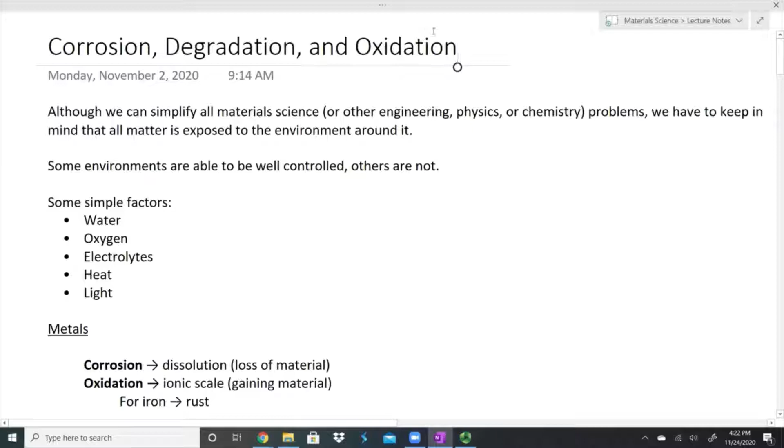So some simple factors we're going to look at are going to be things like water, oxygen, electrolytes, and those are going to be things that transfer electric charge. You watch Gatorade commercials and they say, hey, if you drink this, it's going to replace electrolytes. What it's doing is it's putting ions in your body that's going to allow your body to move things properly between cells. And those are electrolytes. It also works between materials. Heat can also cause things to fall apart, degrade, corrode, oxidize at different rates, along with light.

So we're going to start with metals. We're going to talk about different things that metals can do, and then we'll go through some of our other materials, and then we'll get into some specifics. So first, just really broadly, corrosion. Metals can corrode. Sometimes we use the term corrosion and oxidation interchangeably, but they are different. Corrosion is a dissolution. It's when the material is actually falling apart. We're losing material. That's when something is corroding.

Oxidation, on the other hand, is when I'm actually gaining material. We gain an ionic scale or an ionic film over the top of it. And how do we know that it's ionic? Well, we're talking about metals here. And what we're going to do is we're going to bond oxygen to this metal.

And going way back to the beginning, when we look at what type of material do we have, when I have a metal or something with a mid to low electronegativity and bond it with something that has a higher electronegativity, such as oxygen, we end up getting a ceramic. We end up getting an ionic material. And so that's what's happening here. We gain material. We're gaining some oxygen. It bonds with our metal.

And for iron, and for iron only, we call this rust. It doesn't matter if another metal oxidizes. We don't call it rust. It doesn't even matter if that metal turns an orangish, reddish, flaky color and that it flakes apart. We don't call it rust unless it is iron.

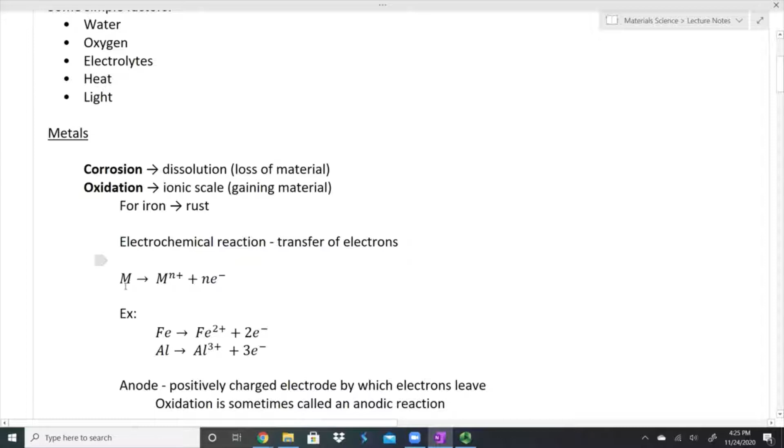So oxidation, and we're still under oxidation here. Oxidation is an electrochemical reaction. It means that electrons are being transferred. And so we just have a little bit of some reaction stuff here. I have some metal, and that metal is going to turn into a positively charged metal and some electrons. We're moving these electrons away from the metal itself.

So I have some examples here. If I have iron, I can get iron 2+, and because of that, those 2 electrons are elsewhere, and so I get my electrons. Aluminum is the same thing. I get aluminum 3+, and those electrons can't just disappear, so I have 3 electrons left over. I also wanted to mention that an anode is a positively charged electrode by which electrons leave. Well, we're transferring electrons off of this. Oxidation is sometimes called an anodic reaction because of this. We are causing electrons to leave.

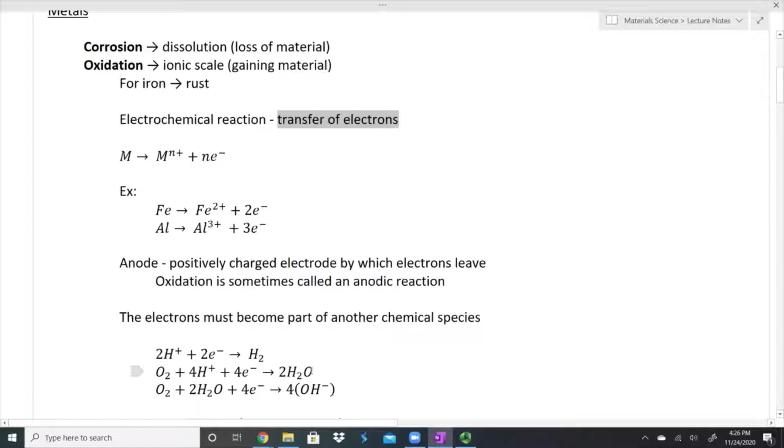These electrons have to do something. They can't just sit there and say, well, we love being free, unbound electrons and just sit here and do nothing. They want to become part of something else. And so here are some options. We can get those electrons to come together with some hydrogen, and we get hydrogen gas. Those electrons could end up bonding together with some oxygen, hydrogen, and we could get water. These electrons are going to do something.

And one other thing that metals do is we get hydrogen embrittlement. Again, this is a type of gaining of material. What happens is hydrogen is a very, very small molecule, and it's very, very easy for it to diffuse into materials. And so when there's enough hydrogen, it's going to diffuse into our metals. It's going to sit at the interstitial sites in our metal lattice. So these are interstitial defects. And what it's going to do, it's going to reduce ductility. And what does that mean? Well, when I reduce ductility, that means I'm increasing its ability to be brittle. So it's hydrogen embrittlement. It's getting brittle because of hydrogen.

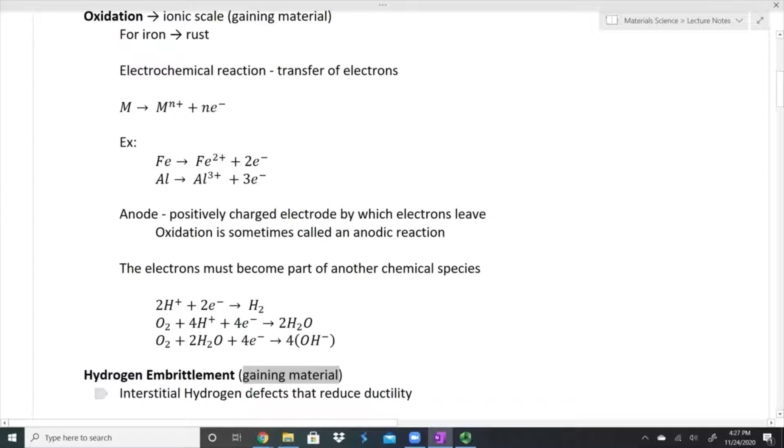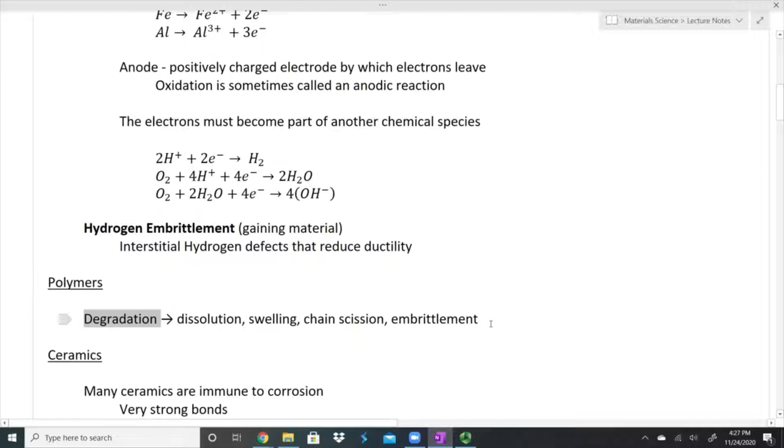So that was really quick. That was metals. I want to talk about polymers really quick. When polymers corrode or do whatever polymers do, the term that we normally use is degradation. So polymers degrade. And what does that really mean? Well, it's this big umbrella that covers a lot of other things, such as dissolution, meaning falling apart. Swelling: it can take in some type of solvent, some type of water or something, and it can swell. Chain scission: polymers are these long chains, and these chains can start breaking down into smaller chains. And if they're smaller chains, then they're going to have different properties. They can become brittle.

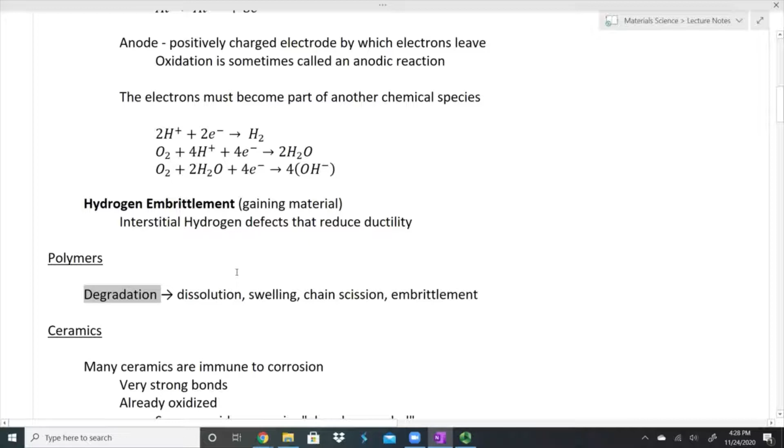So that's polymers. We can talk specifically about some things that polymers do in class. Again, polymers is a huge topic, and so spending any amount of time on polymers is going to take a lot of time, and we're still going to barely be scratching the surface. So we'll talk about polymers in class and answer the questions that you guys have on them.

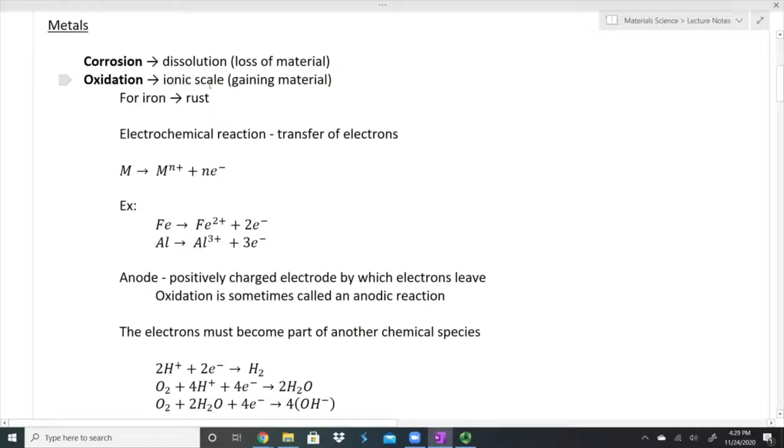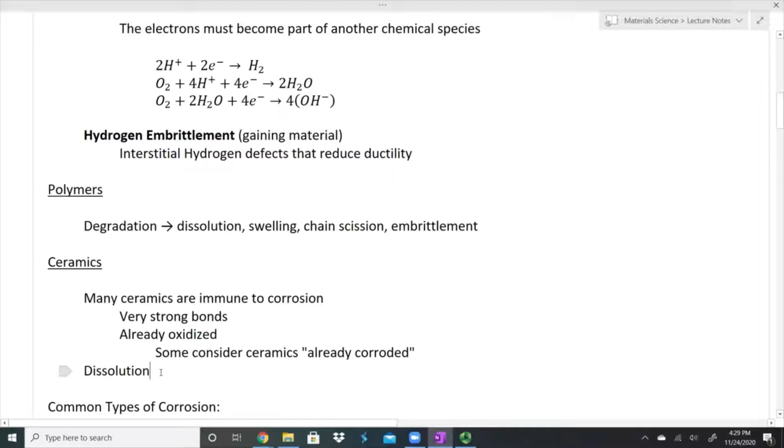Ceramics. Many ceramics are immune to corrosion, or at least a lot of forms of corrosion. The reason for this is ionic bonds are very, very strong, but also they're already oxidized. If we look at it, oxidation in our metals is an ionic scale. Well, that's exactly what a ceramic is, except it's not a scale, it's the whole entire material. We have some metal, something that has mid to low electronegativity, bonded to something that has a high electronegativity. So it already is kind of in the form of oxidation. Some people consider ceramics already corroded. But when they do fall apart, since they can't oxidize, they have dissolution. They fall apart. Again, we can talk about maybe some specific ceramic stuff in class.

When there's some type of electrolyte, something that allows for electric charge to pass through, some type of ions to move, we're going to get galvanic corrosion. Maybe you did this in a chemistry class where you made a battery by putting two pieces of metal into some acid, or you electroplated something by putting one type of metal on one side and another type of metal on the other side in some solution. You passed a current through there, you applied a voltage, and some of one material came off and plated the other side. That's exactly what galvanic corrosion is.

So some examples of this would be when we coat iron with zinc. Maybe you've heard of galvanized sheet metal, or you've gone to Home Depot or Lowe's to buy some nails or screws, and it says that these are galvanized. What it is, they've galvanized it. They've made it to where one material is going to corrode in preference to the other. And if you coat this entire piece of metal with something that's going to corrode, then the electrolytes can't get into the other material.

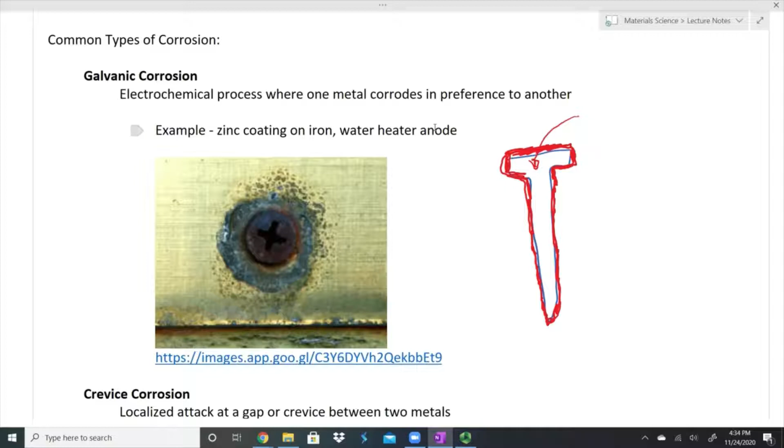And if you've ever opened up a water heater or had to get it removed, this thing has been completely eaten away. It's got holes in it. It's corroding. That means it did its job. What's happening is that zinc anode, again, something that corrodes somewhat easily. When there are those electrolytes in the water that want to corrode something, they're going to corrode the thing that can corrode the fastest. They're going to corrode that sacrificial zinc rod rather than the actual water heater itself, which will prolong the life of your water heater.

We have crevice corrosion. It's a localized attack at a gap or a crevice between two metals. I have this picture here. Two metals were riveted together. It looks like they were painted somewhat as well, which can help with corrosion, but maybe they missed a spot when they were painting it or something happened. But somehow our fluid, our electrolytes, got into this seam, into this gap. And what happens is they get in there and they just sit in there, and it gives them plenty of time to begin the corrosion process.

It's not just the fact that it runs across it as a bead of water is dripping down the surface. They get inside this crack, this gap, this crevice, and they just sit there, and it will work on it and work on it. So there's an example here, but some other examples are if I have some bolts, maybe some washers between the bolts and the surface.

There are little gaps where things can get stuck in there, and it just works on it and works on it until it begins corroding.

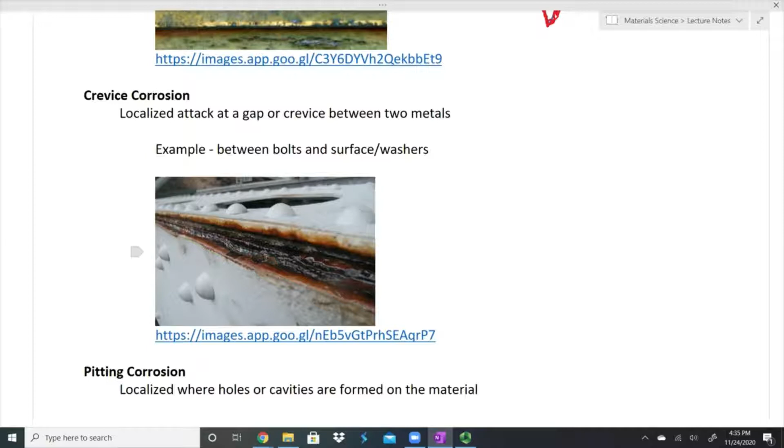We have pitting. Pitting is localized, where localized holes or cavities are formed in the material. Sometimes you can see these pock marks on materials. Pitting is a difficult one to know how bad it is. And the reason for this is I have this surface and I have something that's corrosive on it, some type of chemical or something that wants to start eating away at this spot here.

What's going to end up happening is it's going to go ahead and start corroding it. Okay, we see this pockmark. The problem is we don't know what's going to happen next. And so there are a few things that could happen, and this is why pitting is very, very scary. One thing that can happen is this pockmark can widen out. It just gets nice and wide. That's one thing. It's not great, but it's actually the best of all the things that could happen.

Because something else that could happen is it just gets deeper and deeper and deeper. I get this really deep pit. That's not good. More material loss, especially if there's going to be maybe some bending or some twisting or something that happens. I've lost stability here because I'm no longer having this material bound together. That's not good, but there's even worse things that can happen.

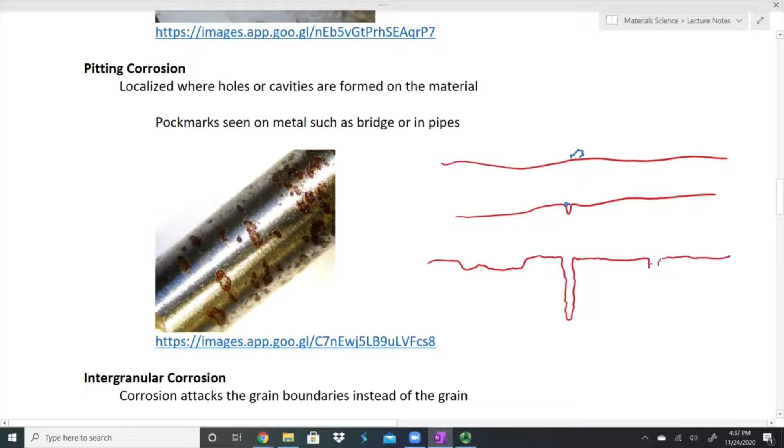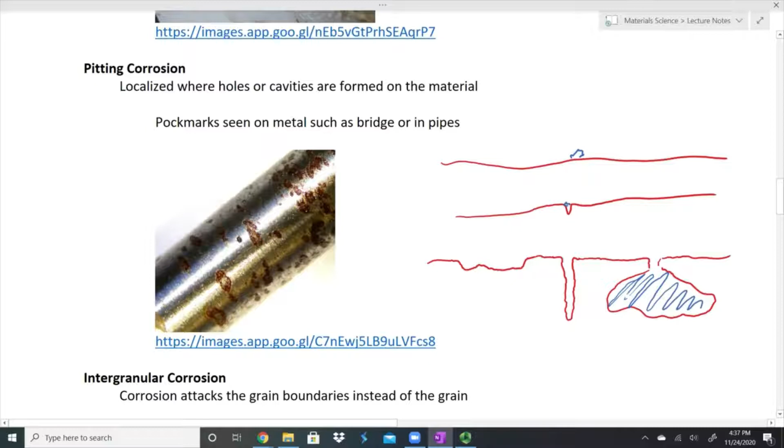Sometimes I have this little hole, but what it's going to do is create a big gap underneath. And it's very difficult to figure out how big this gap is if I can only see the opening. How do I know whether it's big or little? And once this happens, things can accelerate relatively quickly. I have a lot of surface area around here, which means that electrolytes and water can get trapped inside this pit, and it can just keep working on it, and it will corrode it faster and faster and faster.

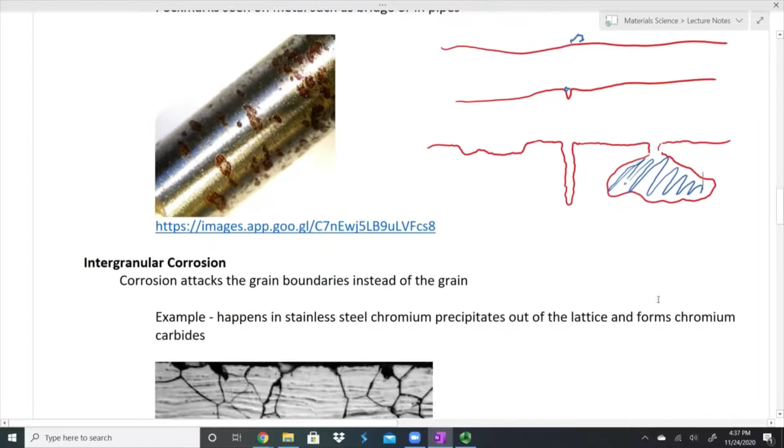We have intergranular corrosion. These are corrosion attacks at the grain boundaries instead of the grain. So normally, if we go way back to when we were talking about defects in materials, one of those defects, our two-dimensional defect, was our surfaces. Surfaces are considered defects because it's a break in our crystal lattice. And so if I have a material, this lattice goes forever deep, forever to the left, forever to the right, forever in front, forever in back, but there is nothing on the top of this.

So that means all of these atoms are bonded together in all directions. The ones in the center have atoms surrounding them all over the place, but the ones on the surface don't. They're open to the top. They're high energy because they're missing something. They're not completely surrounded. And so when something like oxygen comes up, it's going to be somewhat reactive, and it's going to be able to bond onto these spots that are waiting for something else. It's higher energy. So that's how corrosion normally works.

Intergranular corrosion, it's the same idea, but instead of just dealing with the surfaces, we're going to be looking at the grain boundaries. The grain boundaries are also a two-dimensional defect. It is an interface between two grains, and sometimes our corrosion is going to attack at that high-energy grain boundary. This happens in stainless steel. Stainless steel has its iron with carbon, chromium, and some other stuff normally in there.

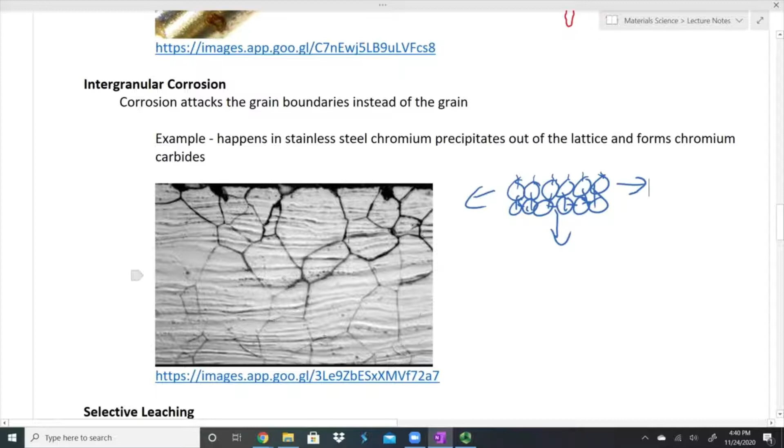We no longer know necessarily what percentage of stuff we have in here, but what's worse is it precipitates to the grain boundaries. And so in these grain boundaries, we actually get these chromium carbides that just sit there, and those don't bond as well as these grains bond to each other. It weakens these grain boundaries and can cause failure.

We can get selective leaching. We get a component within an alloy that leaches out. So here is an example, zinc leaching out of brass. Brass is a mixture of zinc and copper. And under certain circumstances, the zinc will want to leave. The copper's fine staying, but the zinc wants to get out of there somehow.

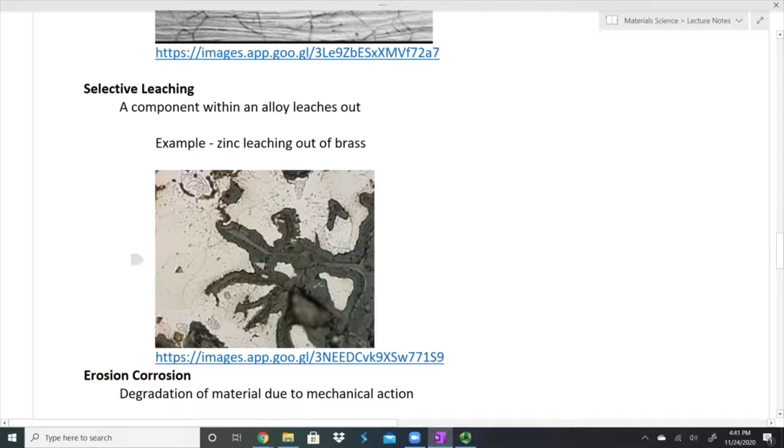And so what it does is it diffuses out and it gets pulled out of my material. Again, what happens is I don't have the same material I used to have because I am losing zinc. So my percentage of copper is going up and my percentage of zinc is going down. I don't have the same material anymore, and I get this corrosive stuff coming out of my material.

This little drip, this little inconsistency in where my pipes join together, is going to cause some turbulence. This turbulence is going to speed up this water and it's going to erode away part of my pipe at a faster rate because of that speed, especially if there's something inside of this water. Maybe there's some abrasive material, little pieces of metal, ceramic ionic particles, or some sand. The more abrasive it is, the worse it's going to be, but it's corrosion due to some mechanical action.

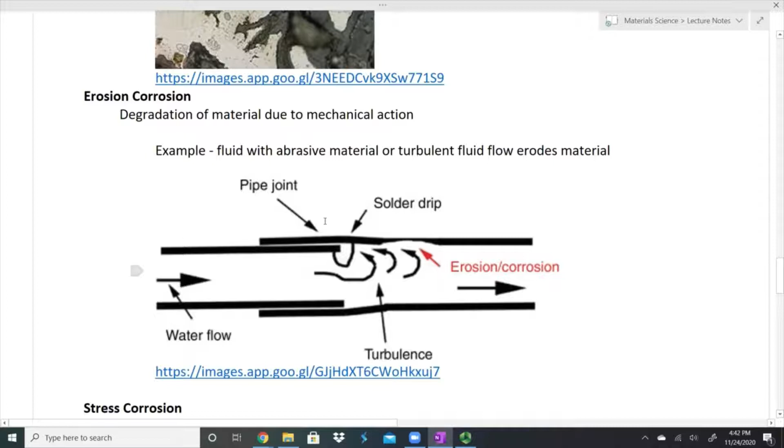There's stress corrosion. This is corrosion that occurs at a crack in a corrosive environment. So we talked about fatigue, and we talked about creep, and how we get these cracks, and these cracks will slowly propagate. Well, what happens if we get this crack, but we're also in a corrosive environment, and inside this crack we're actually getting corrosion as well? It's going to accelerate our fatigue and our other problems.

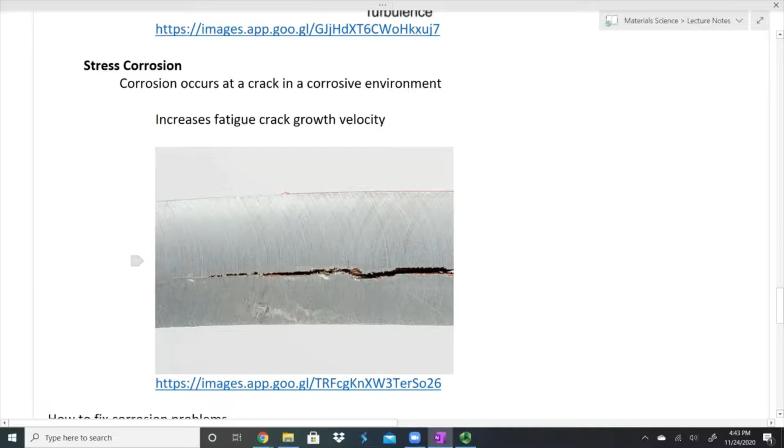So that's not good. Once we have these little cracks, yes, the cracks can grow on their own through loading and unloading or through constant loading, but we have to keep in mind that things are more complicated than just loading and unloading. We're in this environment that's corrosive, and it can also add to this crack getting worse and worse through corrosion.

So we talked about a whole bunch of different ways that things can corrode. So the question is, how do we fix this? There are a few ways. This is by no means all the ways, just a few quick ones. One is we can insulate. We can put some type of physical barrier in there, a barrier from the environment. We can coat something. We can paint something. We can put a ceramic coating around something. We can insulate it from other materials.

If I have two different types of materials in an engine that are in contact, and there's fluids flowing through it, and air, and high temperatures, it's an area that could corrode really quickly. What do we do? Well, we could put a gasket between them, even if it's just a thin piece of paper, so those two metals are not in direct contact with each other.

What that's going to do is help insulate so that we don't have direct contact. It means that maybe we won't get that galvanic corrosion as easily. We could reduce cracking and we can reduce stresses. That can help fix some corrosion problems.

Some ways to do this is we use better materials. We don't use cheap materials that maybe are weaker in the first place, so those cracks won't start as soon. Another way is we could get a better design. We could add something into our design to strengthen our material so that it's not bending as much and those cracks don't happen as easily. We can add inhibitors.

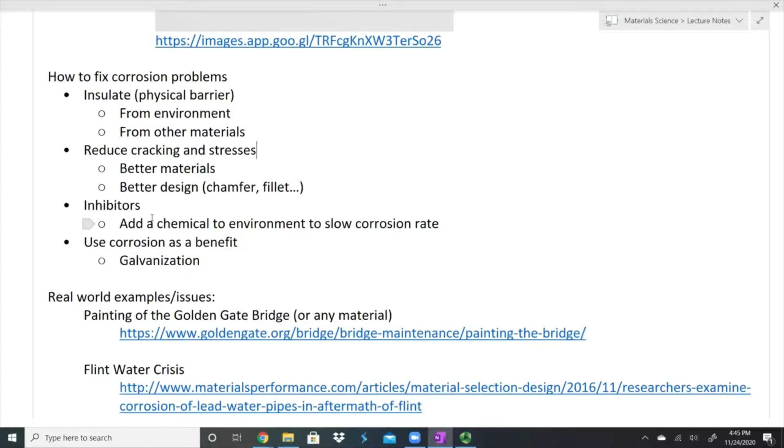Inhibitors are adding a chemical to an environment, to an electrolyte, to a solution, to a fluid, to whatever. And what it's going to do is it's going to help slow that corrosion rate. We could also just use corrosion as a benefit, such as when we galvanize things. So there are a lot of real-world examples to these.

Recently, a bridge nearby the college, there have been some problems, and they found that it was corroding quite a bit. It wasn't a big bridge, maybe just 50 to 100 feet, but it took them a year and a half. They had to strip off all the paint. They had to take off all the rust. They had to fix all the corroded parts. They had to repaint it. It caused traffic problems, all kinds of things. There are lots of real-world examples of corrosion.

I have 3 things here, and I have already opened them up. I'm going to try to remember to add these to the description in the video so that you can click on them as well. One of them is bridges in general, the Golden Gate Bridge. The question is, how often do they paint it? Why do they paint it? And all those things.

So this is about the bridge, and they talk about some misconceptions about how often it's painted. Goes through the history of what types of paint they use. They used lead-based paint a while ago. They started cleaning that off. They changed that top coat to a different type, from a vinyl to an acrylic emulsion.

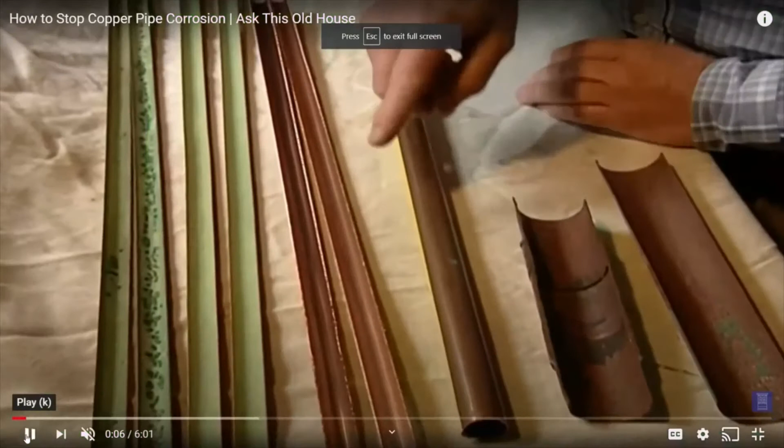Then I have this This Old House video. They took some copper pipes. They were redoing a house. This is a brand new copper pipe. They cut it open and it looks like nice copper and everything. That's because it's brand new. There's this pipe in the middle they cut in half and it's green on the inside. It's been oxidized, but you know, it looks pretty good still.

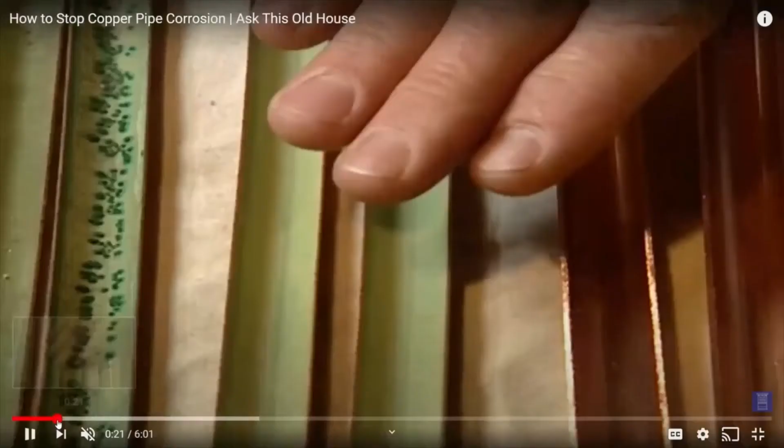It's just been used. The pipe all the way to the left here, it's been oxidized, but we also see these dark green spots. Those dark green spots are pits. This is probably some type of horizontal pipe, and when the water turned off, the water just sat there and it worked away, and eventually you're going to get things like holes. It's going to pit so deep that you get a hole through your pipe, and then the water drips. And so this is a 6-minute video. They kind of talk about the different pipes.

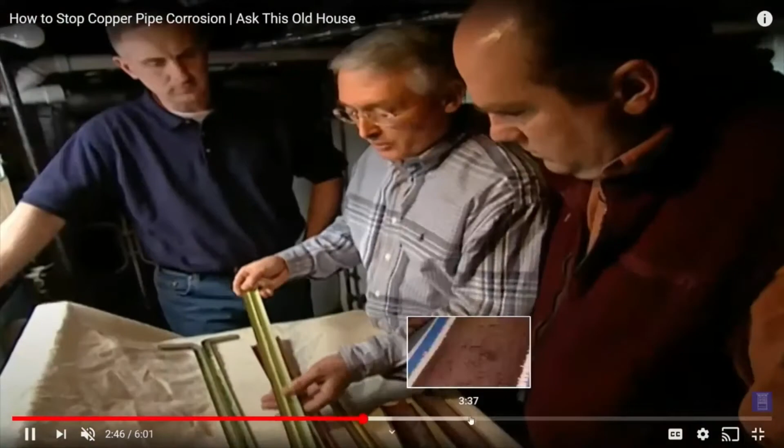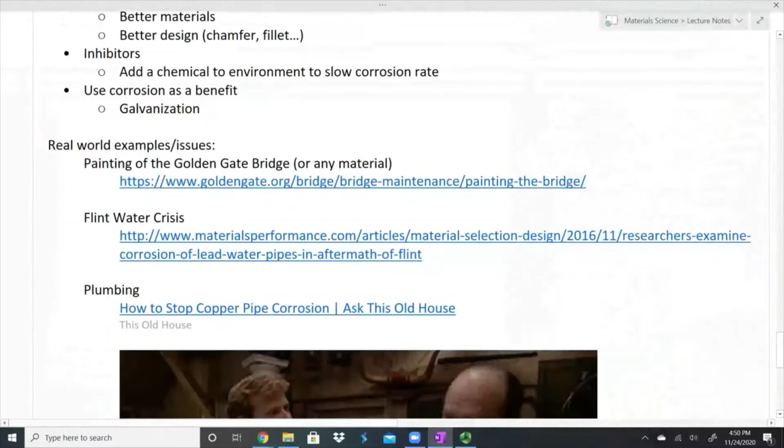They talk about the whole aspect of it. So there's some pits that went all the way through on some images. Some interesting things. It's all the way around us and everything because, well, we live in an environment that is going to have corrosive material. So we can't just apply it sometimes. It has to be applied all the time.

Now, this last part here, it doesn't necessarily fit in with corrosion, but I figured it would be an interesting spot to put it in because it is a reactive thing. Corrosion is a reactive process. And we need to understand that as a material has more surface area, it's more susceptible to reactions. And this also is something that's important with corrosion.

But what I want to do is I just want to kind of put a little plug in there for a branch of material science, nanotechnology, looking at things that are very, very small. And that is one benefit of nanotechnology. It's not the only benefit, but one benefit of it is the fact that these things are very, very reactive. Using nanoscaled materials, nanoparticles, maybe for medicine or something like that, because they're reactive, could be a very, very good use. And so there is a quick way just to kind of visualize how surface area can increase reactions.

If you get 2 cups of water and 2 Alka-Seltzer tablets, those tablets that you open up, you throw them in the cup and they dissolve. The bubbles come out of them. You watch them in those movies when people are really stressed out. But if I get 2 cups of water, 2 Alka-Seltzer tablets, and one of the tablets I keep whole, but the other one I grind up into a powder, if I drop them both into the water, the one that stays whole, it will dissolve. It'll take some time, 30 seconds, a minute, something like that. You'll see the bubbles coming off.